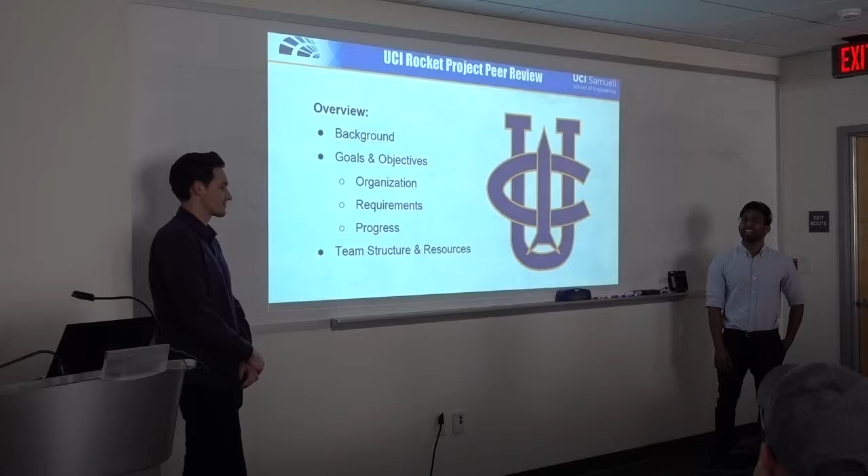The Chief Engineer in Training. I'm Brian, the in-training project manager for the UCI Rocket Project.

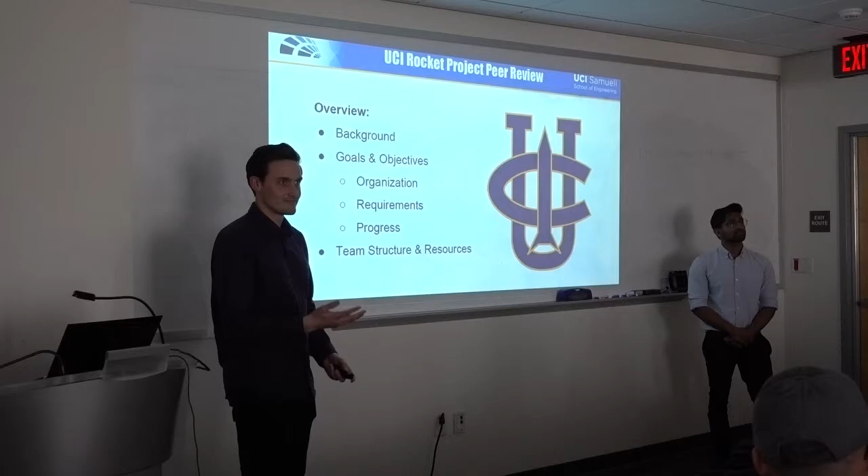Today we're going to go a little bit into our background and then talk more in detail about our goals and some of the progress we've made over the last quarter and a half or so. And then also talk about our team structure and budget a little bit.

We can definitely see that the space industry is growing. In the last decade or so, new companies have opened up like SpaceX, Blue Origin, Vector Launch, and all the major ones are hiring engineers like crazy. A lot of us on the team have a pretty big desire to work for companies like that, so we just want to gain some more marketable skills and also apply some of the coursework that we've learned.

In a real-life project, with those motivations in mind, we decided to pursue a liquid bipropellant rocket engine. We're one of just 30-plus teams in the US doing so. There are plenty of other universities that have rocket teams, but in general they design solid rocket motors, which are a lot easier. We decided to choose a liquid rocket engine because it's the industry standard, and we wanted the challenge, and we think that we can do it.

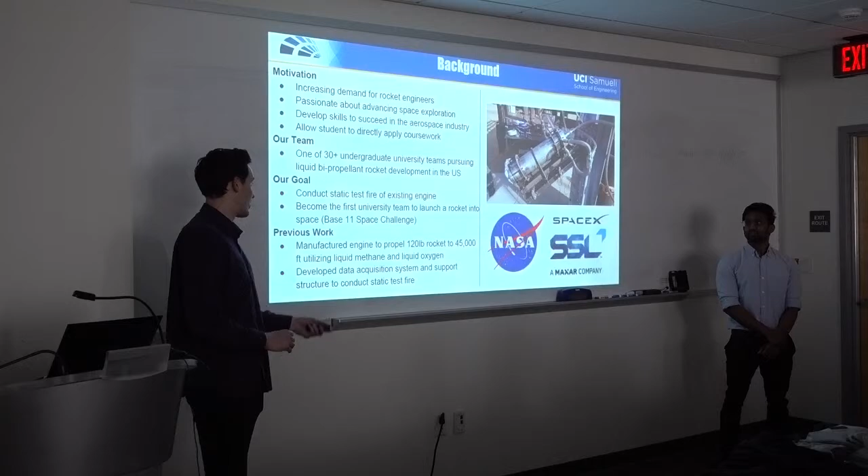So our focus right now is surrounding two main goals. We want to conduct a static test fire of our existing engine, and also we want to become the first university team to launch a rocket into space. Concerning that second goal, we are actually involved in a competition put on by a company called Base 11 that has a $1 million prize purse, and the launch windows for that are spanned across the majority of 2021.

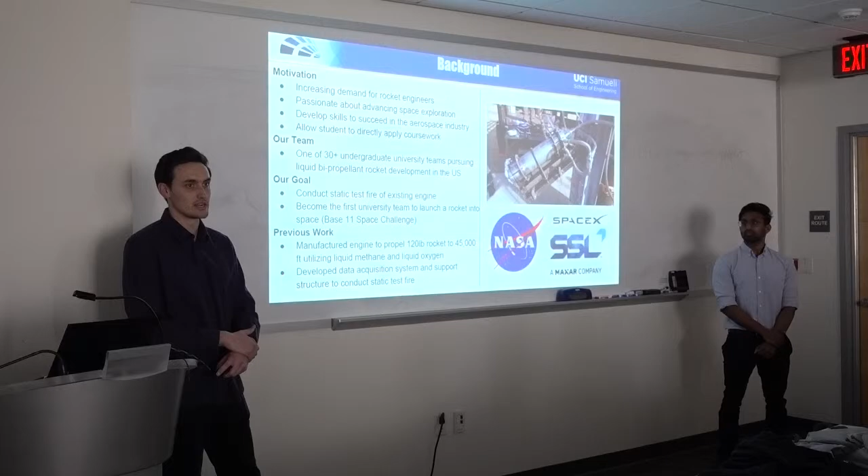Previously, our team has actually gone through the entire process from conceptual design to actually manufacturing an engine designed to propel a rocket to 45,000 feet, and also the surrounding supporting structure with that - our data acquisition system, plumbing, load-bearing system for testing.

So with that first goal, conducting the static test fire of our engine, it's broken up into three main components. We have our engine, our test stand, and our data acquisition system. Right now we're currently in the manufacturing stage with a lot of those components, or purchasing stage, and moving on into the testing. It's been pretty challenging because anything that goes wrong with these tests means an explosion, right?

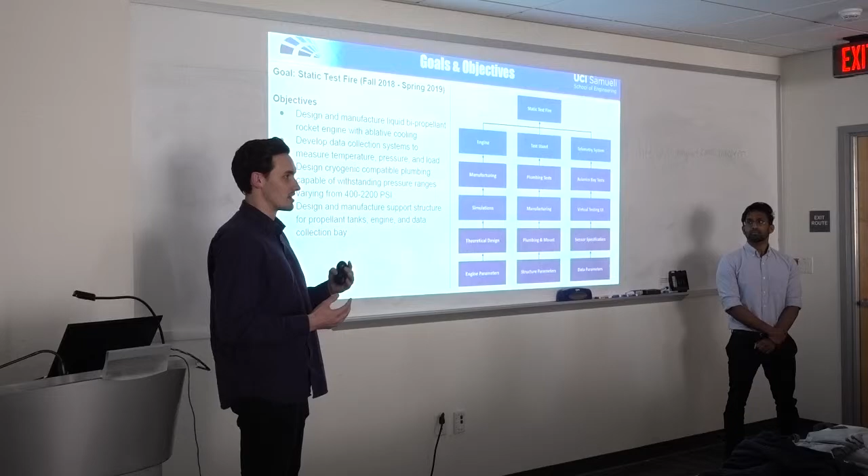So it's taken a little bit more time to go through all the procedures and create thorough procedures, because we keep noticing things that are wrong, keep noticing things that need to change, that we need to make sure are correct and safe. So, but we are making progress.

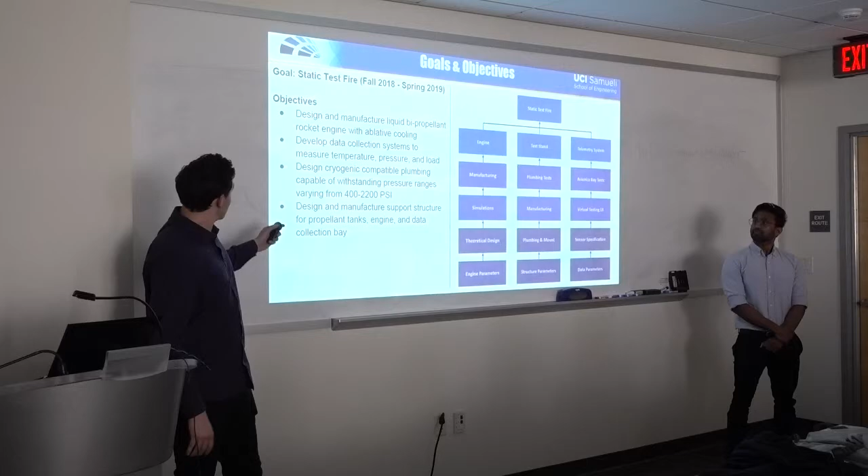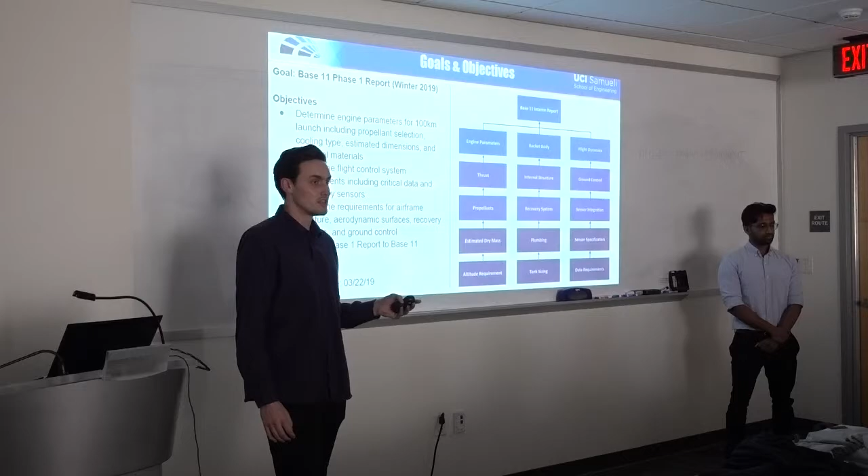With our longer-term goal of the Base 11 launch, we have a few deliverables that need to be met to stay involved in the competition. The next one that's coming up is our Phase 1 preliminary design report. It's a somewhat in-depth review of all our major subsystems.

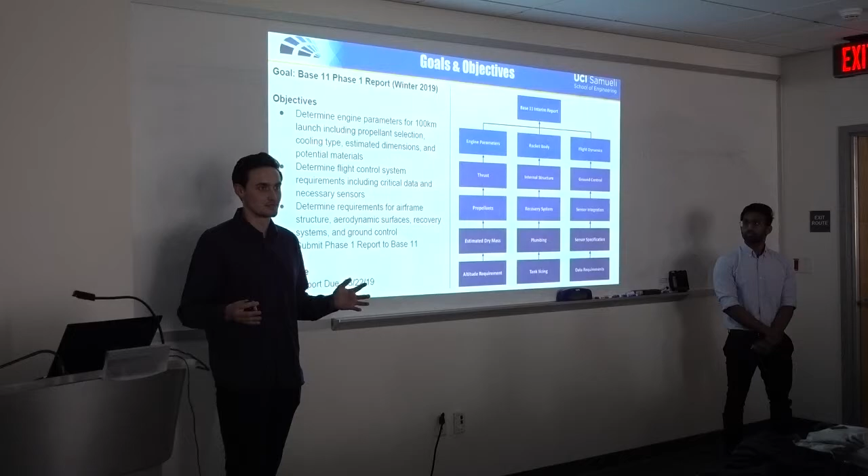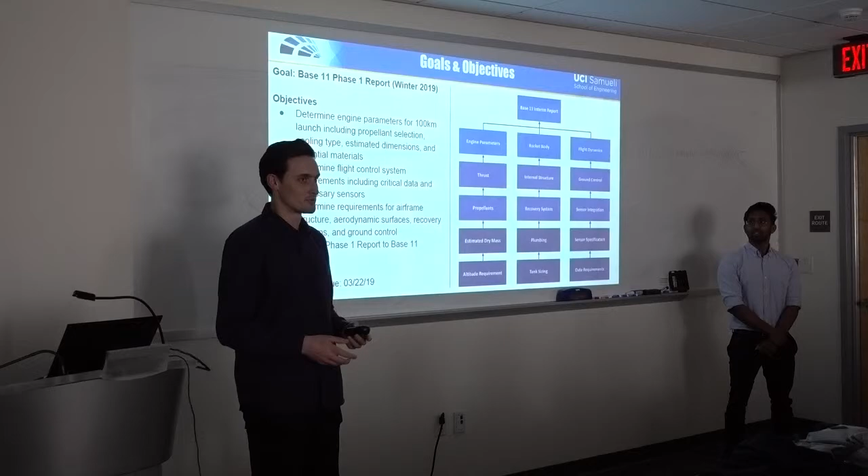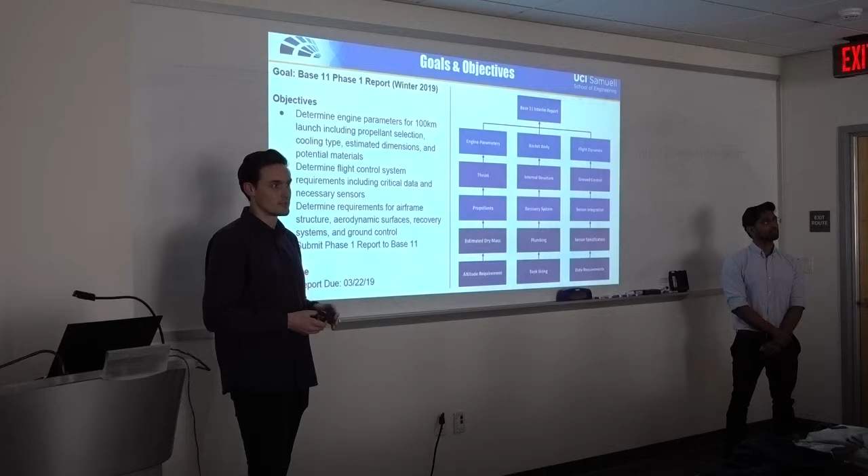And the report has about 15 to 20 categories, including things like aerostructures, injector design, combustion chamber design, safety, ground operations. It's probably going to be like a 300-page report. It's a very challenging and difficult deadline to meet, and a lot of those subsystems will have to be developed from scratch. But our previous experience with the current engine that we're working on is helpful, because some of those subsystems can either just be transferred over or just scaled up.

All right, so this is a quick overview of our timeline. We did have to modify some of our testing and manufacturing deadlines from last quarter. The important milestones are highlighted on the second column right here - our Phase 1 report, static fire, and Phase 2 design entry, which is starting right after that.

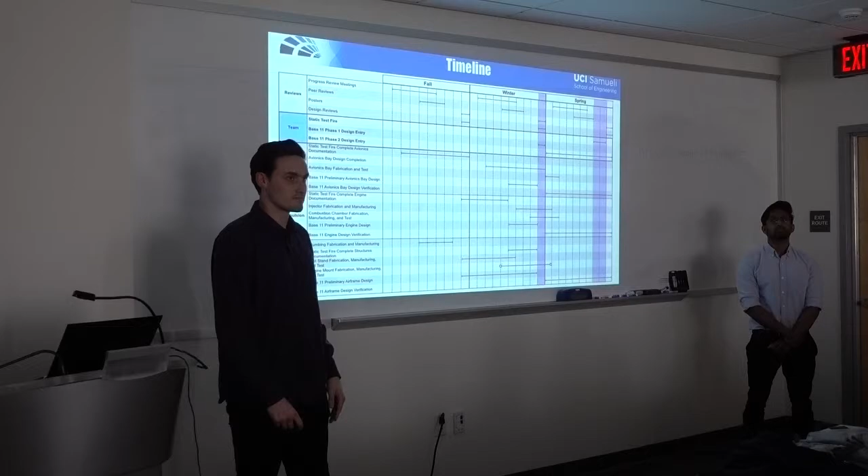And those purple highlighted columns are columns where those milestones need to be met. We try to make it so that no other sub-teams have anything to do that week, since it's such an important time. Within our sub-teams, everything's kind of broken up between manufacturing, verification, and testing.

So this is how our team is broken up a little bit. We have our advisors up at the top, Professor Walter and Professor Mies, and then the project managers. Rashid is the current project manager. He's leaving at the end of the quarter, so I'm training to take over.

The project managers generally try to stay away from the more technical side of things. That's why they handle mostly like timeline, admin, presentations, stuff like that. That's why they're directly involved on the operations side of things, where it's handling the purchasing, catalog, data management, those sorts of things.

And then for the technical side, the chief engineers directly report to the project managers. The chief engineers are responsible for making sure that all the sub-teams can successfully complete their goals in a timely manner and have all the resources that they need to be able to do so. And then our sub-teams are broken up into structures, avionics, and propulsion.

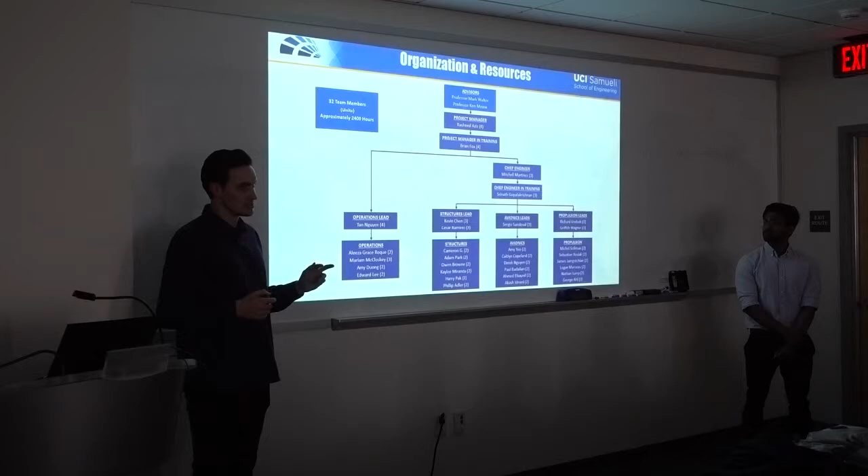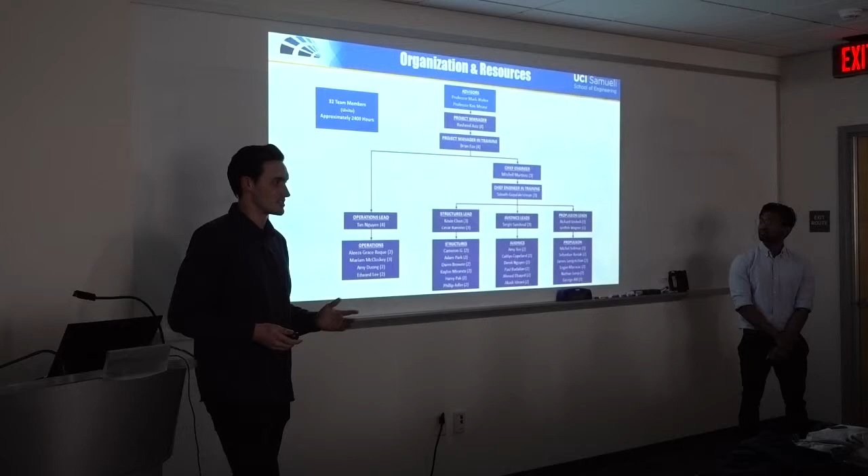And we try to have about 2 leads on each team. Personally, I don't like to have a lead ratio higher than like 1 to 5. I think once a lead starts managing more than 5 people, it becomes a little bit chaotic. Although we're having trouble filling that spot with avionics.

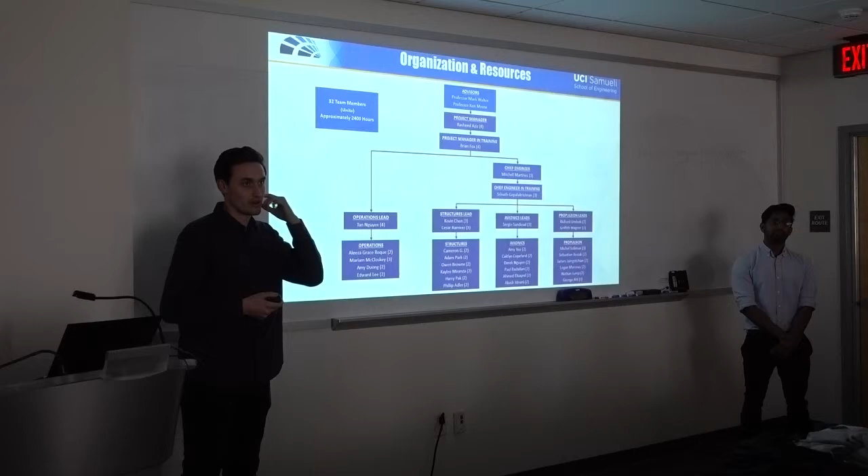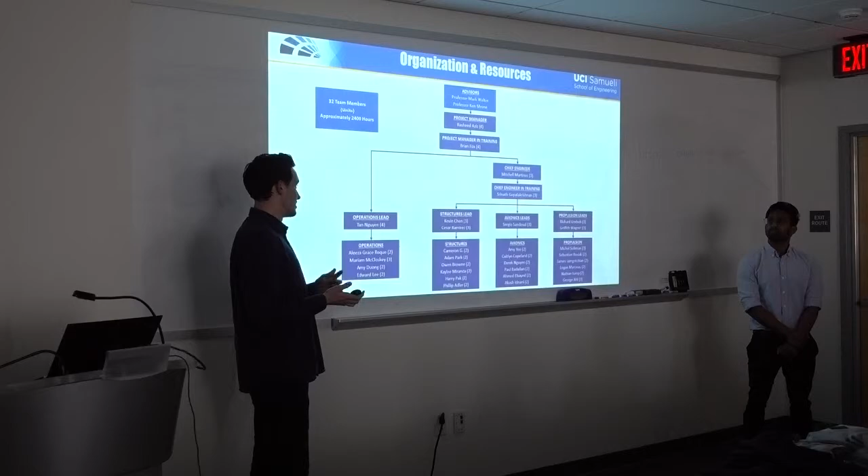We are also currently recruiting pretty heavily for the Base 11 competition because it's such a large and difficult design, and we'll likely be adding more sub-teams like launch operations or safety to deal with that, since currently safety is involved in our operations sub-team.

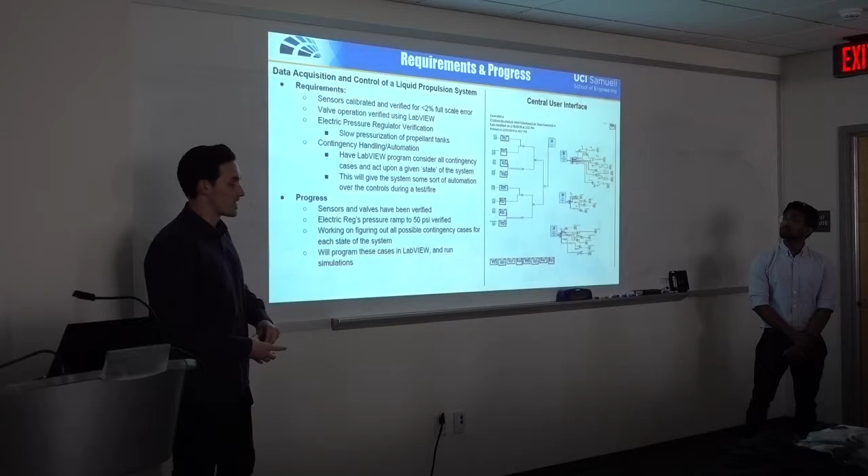Our avionics sub-team this quarter has been verifying and testing all our software and hardware. On the software side, they created a LabVIEW VI that controls all the actuators, such as our valves and pressure regulators, and takes in all the sensor data and processes it—everything from pressure transducers to thermocouples—and puts it into a neat, user-friendly interface. It also contains contingencies, so if anything goes wrong that the sensors can detect, it'll shut off the valves accordingly. That's all being coded and implemented currently.

On the hardware side, all our sensors this quarter have been verified for accurate and timely readings. Same with our valves, making sure they actuate when the signal is sent. And same with the pressure regulators, making sure they can ramp accordingly so we don't turn it up all the way, ensuring our system doesn't fail.

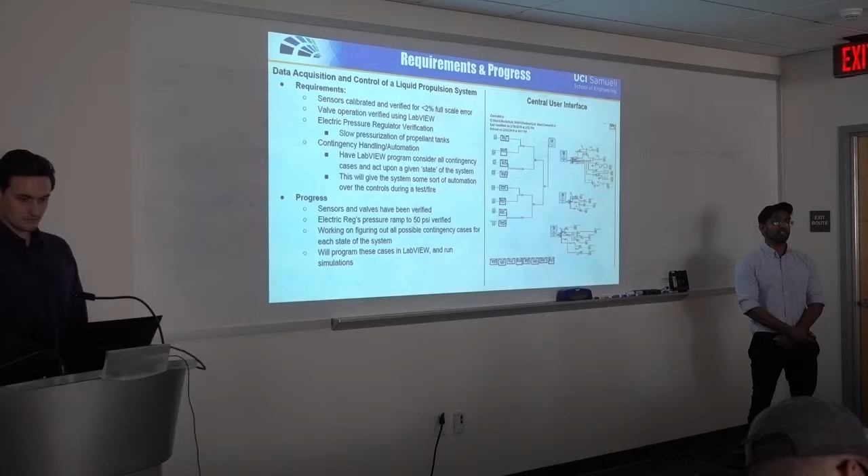Back on the software side, they're still working through contingency plans, looking at all the different failure modes that can occur with our cryo systems, pressurant systems, or anything in the injector. We're making sure we account for all the contingencies, and planning accordingly how to shut off which valves depending on each one.

Our propulsion team has been focused on taking our design from previous quarters and moving it toward the manufacturing phase. Early this quarter we made sure all our manufacturing processes for each component were finalized, and made sure we found a good vendor to manufacture our parts. So, working from top down.

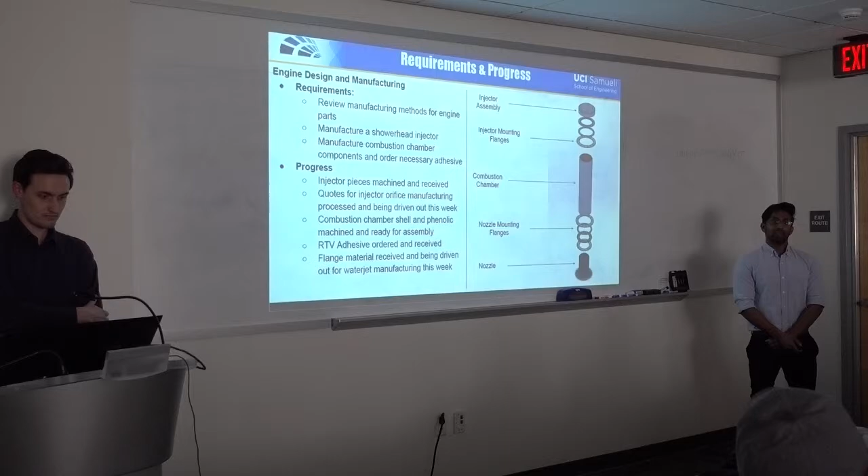For our injector assembly, we had that manufactured by Xometry over winter break, and we received it early this quarter. It's currently being sent out for manufacturing our orifice holes, which are tiny—on the order of 20 thou holes—that will be EDM'd by Die Molding Corona.

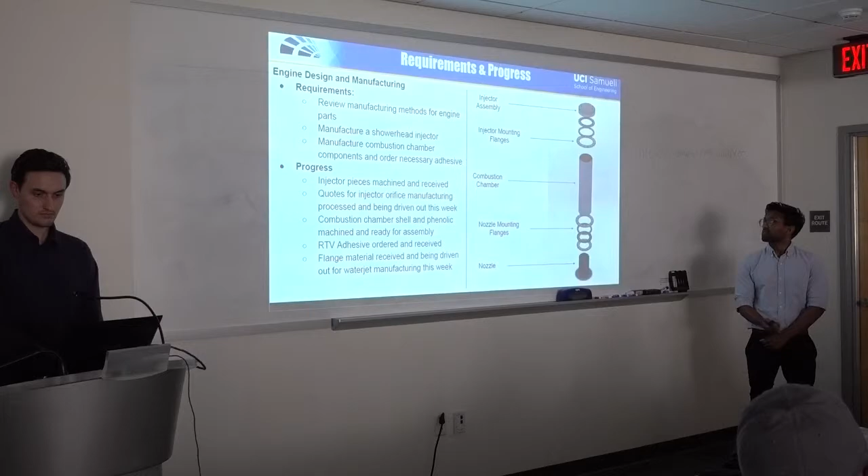Moving down, our combustion chamber is being manufactured in the Physical Sciences machine shop, basically cutting everything to size and making sure all our interfaces are correctly machined to the right tolerances.

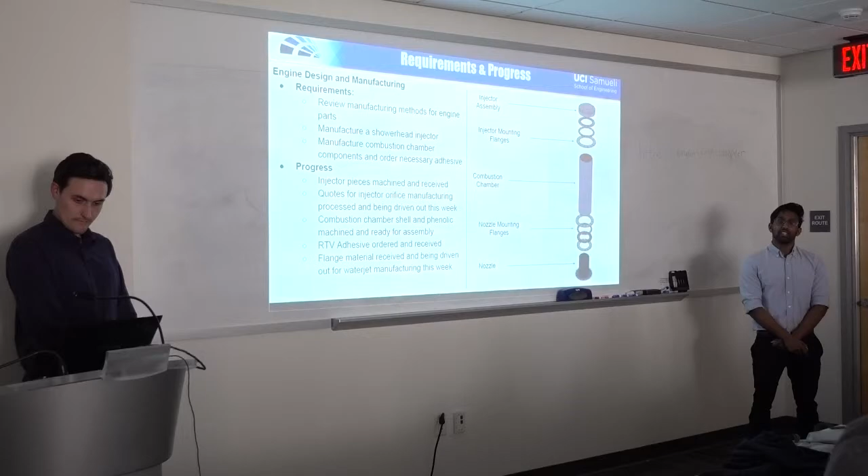Also being sent out this week are our mounting flanges for both the nozzle and the injector. These will be water jetted by a local company, made from a combination of steel, aluminum, and phenolic. Finally, our nozzle was manufactured last year by a previous project, so that's ready.

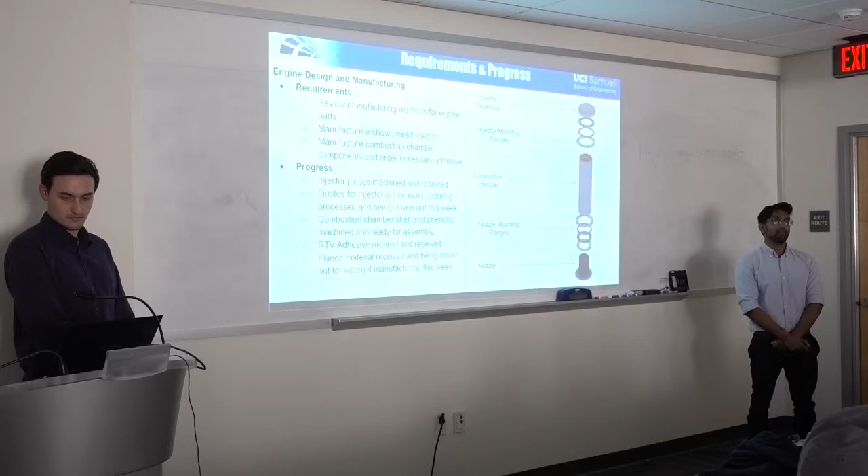So in a week or two, depending on manufacturing lead times, we'll have everything ready for assembly. Finally, our biggest endeavor was the test stand, which had been designed and analyzed up through last quarter. This quarter was mainly focused on making sure we have all our parts in and that our assembly is neat and tidy.

The team's been developing assembly procedures and re-verifying them, making sure all these parts fit accordingly, so that when we go out to the desert next quarter, we know exactly when everything is being screwed in, bolted in, and where everything is at all times.

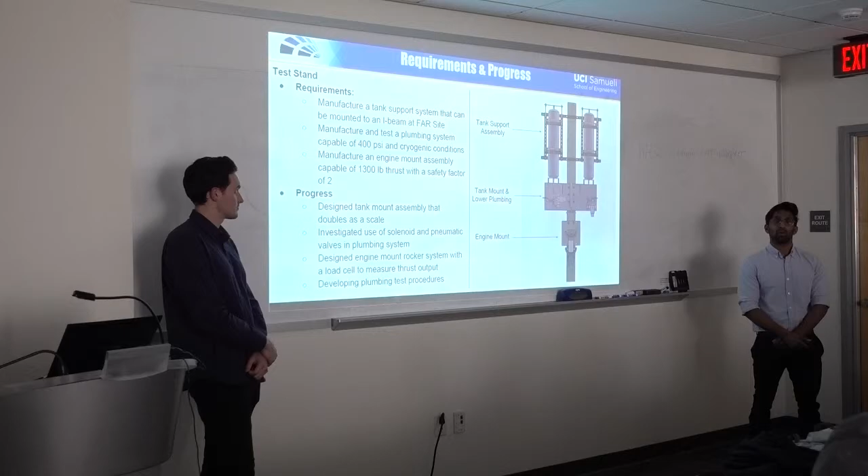The team has also been working on testing procedures for our various tests, all the way from our pressure test, water test, and cryo test, up to our static test fire. They've been re-verifying all the procedures and everything.

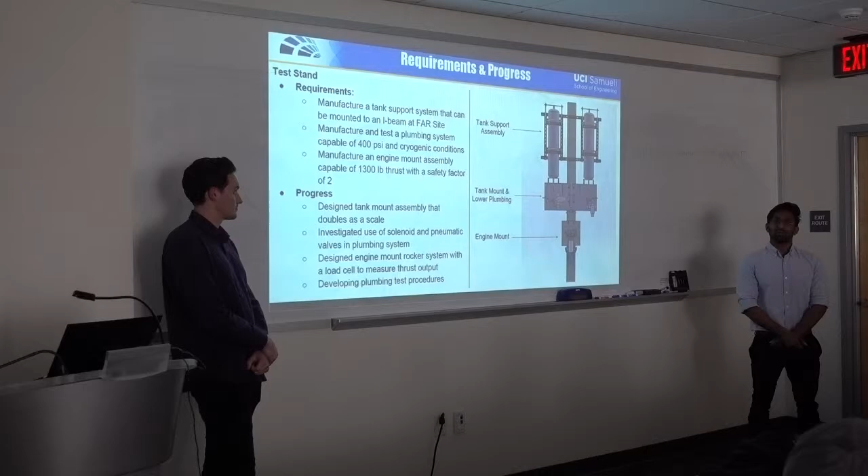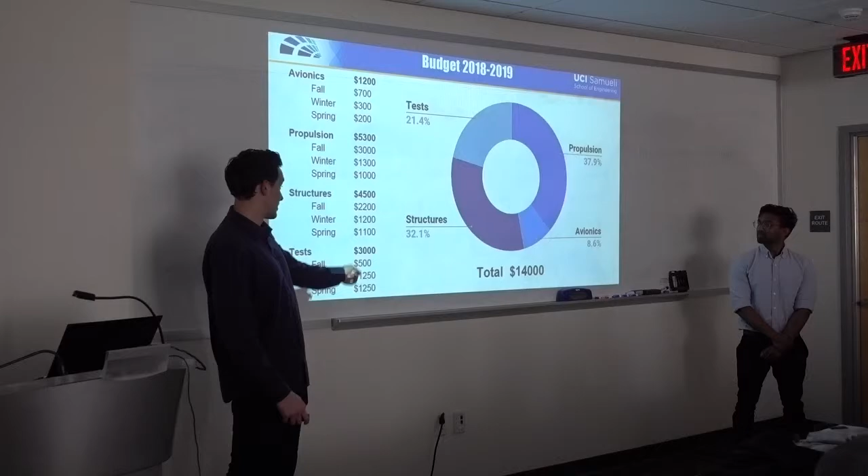Everything else, we're about halfway, so it looks like we're still on target. I forgot in the last one—we had about $14,000 total, and spent a little more than half, and we're a little more than halfway through the year, so pretty much on target for that.